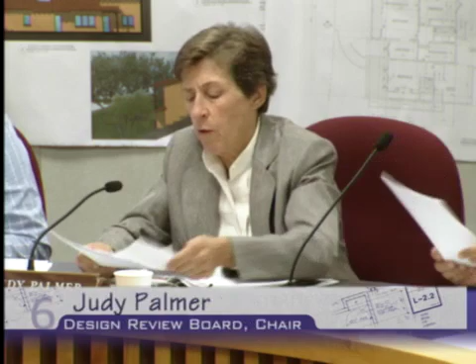Our first case is PDR 1407873-R, 3540 Buena Vista Avenue. And Ms. Toledo, if you please give us a synopsis.

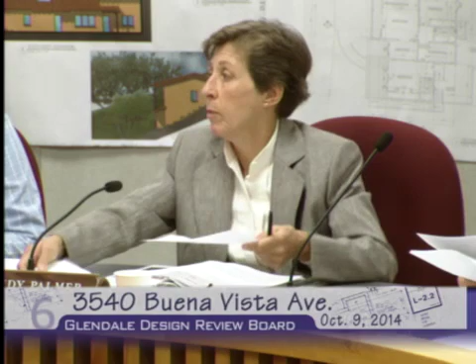Yes. Also, I'd like to put up on the board a couple more items before I start my presentation. I'd like to pass around the material board and the photos, and I'd like to put up one of the renderings. Also have the same rendering board that the architect can refer to, or the public.

If you recall, this project was before you back in June of this year, and at the time the board made a motion to return the project for redesign. So the project has returned with some modifications compared to the previous design. I have pinned up the old and new plans behind you: the new elevations, modified site plan, new landscape plan, and the floor plan.

So the applicant is proposing to demolish the existing one-story single-family house and the garage, and they're proposing to construct a new two-story, 2,495 square foot single-family house and a new 460 square foot detached garage at the rear of the existing 6,500 square foot lot.

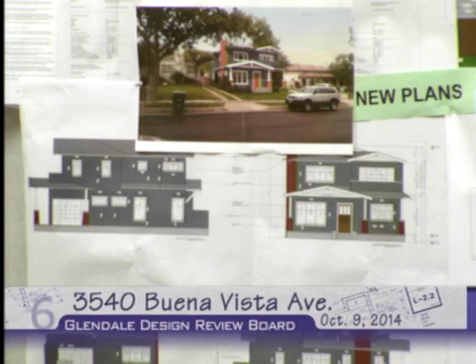Let the record show that we have received, once again, several emails or correspondence from neighbors in the neighborhood in opposition. We also received a letter from the Montrose Far Heights HOA, also in opposition. And we also received some letters in favor of the project, submitted yesterday by the applicant.

At this time, I conclude my presentation. If you have any questions for staff, I'm available.

No questions - we've all received those letters and read them. Yes, I have distributed all the copies. I wanted the record to show that, because I mentioned to everyone who sent me emails that I would forward those letters.

If we have no questions, then I'm going to open the hearing. Does the architect or the owner want to speak first? I have 2 of the owners and 1 for the architect.

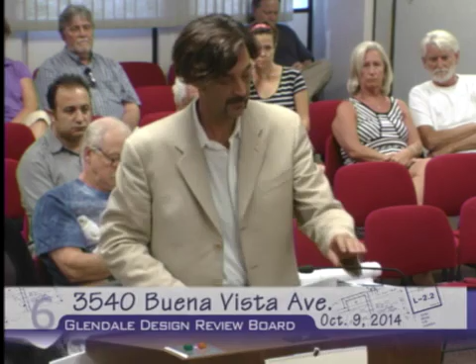Please state your name and address for the record. My name is Robert Thibodeau, and my address is 624 Venice Boulevard, Venice, California. Is that better? Can you hear me?

When we came here in June, you guys were concerned about the massing of the building, and the story poles showed some problem areas. So what we did was we moved the entire building back 5 feet, because there's a difference between the required setback here and what the neighbors are built on, the building line of the neighbors.

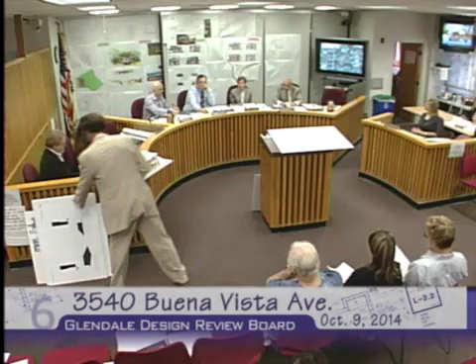So before we had been building to the required setback, we slid the entire building back 5 feet. This diagram shows that - we slid the building back 5 feet and then further reduced that. We already had the front porch designed, an additional 5 feet back from the neighbors' buildings, so we're another 5 feet back here, then another 3 feet back at the second floor.

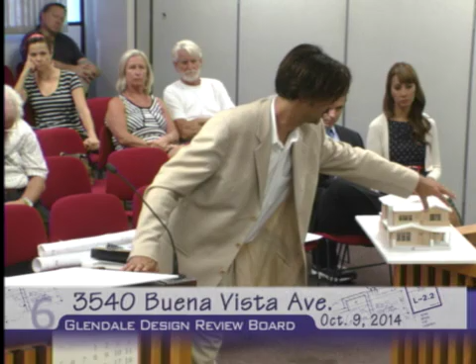This is to reduce the mass from the street. We had originally had a projection here, took that projection off and kept it flush with the rest of it. It made for a little less differentiation in the front, but it pulled the mass way back from the street, so the building would step further back.

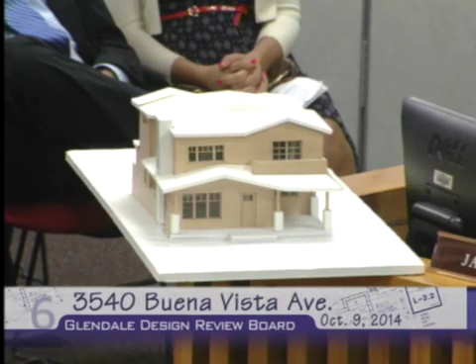The original building also had a slightly simpler roof line where the gables ran end to end, and we modified the roof line to be a hipped roof type, which was actually a suggestion from your design department. That lowered the height around the edges down to 22 feet, where 28 feet is allowable. So at the peak, we're 1.5 feet under, but the peak is centered, and we're 1.5 feet under the height limit there.

But at the edges that face the neighbors and the majority of the rest of the property, we're actually 6 feet under the height limit. So we feel we've done a really good job in pulling the mass down.

Then in terms of stepping the mass back, we went around the building and looked for spots on the second floor design where we could cut the square footage back. So what we did was, this was that spot in the front I was talking about where we took the mass back to pull it back from the street. We snipped back a little extra all the way along the front, and pulled in both sides.

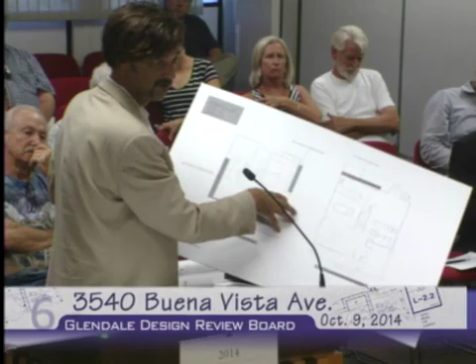We actually added a little bit of square footage downstairs to make up for some of the square footage we were losing upstairs, but there's an overall reduction in the project size of a little under 100 square feet, about 90 square feet. We reduced the entire project size.

Then there were specific comments from the rear yard neighbors, who I think are going to speak next. They were concerned about the master bedroom facing rear, which was the owner's desire to have more quiet before. So they wanted the master bedroom to be in the back.

So what we did was we flipped the layout on the second floor, where now the master bedroom faces the front, and the bathroom and closet are in the back. That was in response to these neighbors. We took the design and flip-flopped it.

There was also a balcony originally in the back. We removed it because they had privacy concerns, and they might have too, I can't remember. So we took the balcony off the back and put it on the front, where we had pulled the mass back, just to give it some differentiation. You can see the areas cut back on the side, cut back here, and the reduction and stepping back in the front, and the way the roof steps down.

At the garage, we had also had a gable roof, so the peak went to both ends, which increased the height as seen from the neighbors. So we changed this to a hip roof design so we could have a lower face, and we also lowered the ceiling of the garage by a foot down to 8 feet, which is about as low as you're going to go.

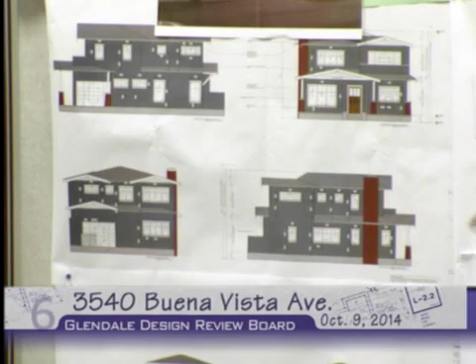Here, I see, this is it, the lower right one. This is the line of the roof going along. This is the chimney. This is consistent. No, I'm talking about this peak in here. See if you have this straight. That's what your model shows, and it's going to be a little higher. So I think the model is more correct than your drawing.

But let me ask you a question. Why did you do a hip roof in the garage versus a gable? Because the height of the garage was a big issue last time, so with the hipped roof, it keeps the roof lower on all four sides.

When I go to a gable end roof on the garage, two sides are going to be high. It'll either be, you have to choose: either this neighbor is going to get a high side, or these neighbors are going to get high sides. When I go to a hipped roof in the middle, I can keep it low and consistently low all the way around. But the height basically doesn't change, since the slope is the same. It's just how you orient that gable.

But you have a 12-foot point at the peak. If the peak is in the center of the building, I don't think it affects the neighbors as much as if the peak is at the edge of the building. What's the height requirement for a gable roof for a garage? 3 and 12, they can go up to 15 feet. Right, yeah, thanks. Is there any reason you have a 10-foot floor plate on the bottom floor?

A 10-foot floor plate is a desirable height for new build construction for a living room. It's not a particularly tall or short ceiling height, it's what clients would normally expect. You're 2 feet off the ground in addition to that, so the plate's like 12 feet off the ground. So it was a preference, is what you're saying?

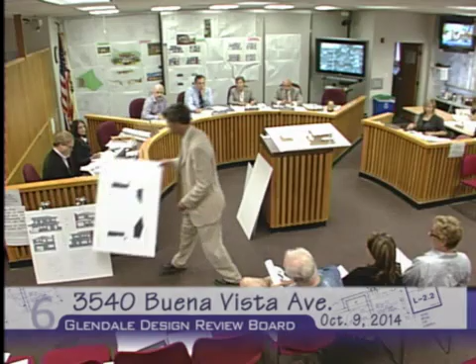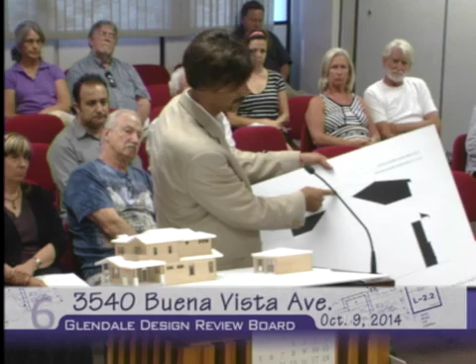I have a diagram of the height of the original building, which is a two-story or story-and-a-half building. This is the peak of the building that sits on the property right now, and this is our peak. This black line is what you see in the front, with the gable end. This is new construction we're adding, we're not going backwards. But if you compare the profile of what you see now versus what you will see, it's gotten a little bit bigger, but not really all that much bigger.

Did you explore putting some of the square footage from the second floor on the first floor? We did. We moved about 100 square feet downstairs, and we got the rooms to a size that we felt was about as small as we could get, because we want a 3-bedroom house.

Did you consider putting one of the bedrooms downstairs to expand that? That was suggested by Jay, but they didn't feel that raising a family and putting one child downstairs while the master bedroom is upstairs was a lifestyle choice they were ready to make at this time. In some ways they didn't feel they should be asked to do that. But that was definitely brought up.

Any more questions? Another question, madam. Sorry, I didn't mean to interrupt. That's okay. Let me get my train of thought again.

I noticed you have different roof slopes. How is that going to work all around this roof, especially the front? Because when you have this balcony and the roof cut with all these small edges, the slope is not matching with the rest of the house. It's going to be a technical issue or a problem when you construct this. If you lift this, the slopes are actually consistent throughout the house. I don't see it on the roof plan.

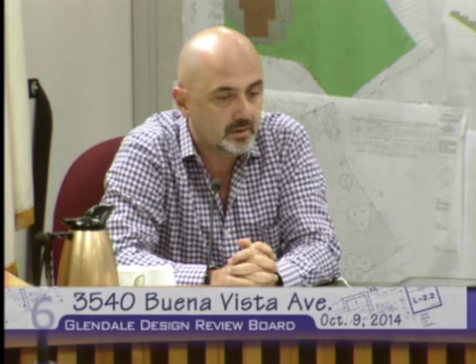In the past, we've had a lot of success when we've given advice and direction to applicants, especially when we send a project back for redesign, we definitely expect the applicant to work with staff. When it comes back to us and the majority of the items that staff indicates haven't been met, that brings a red flag for me, and I start scrutinizing and reviewing the plans a lot further.

I'm not sure if the applicant understands. In my opinion, reducing the mass and the scale isn't about pushing the building back a foot or two, it's the mass and the scale. It's not playing and Mickey Mousing the roof formation and lowering it 9 inches. The height is still the same, floor to floor, 10-foot ceiling height and 9-foot ceiling height, those are still the same. Sitting on a 2-foot podium, that's still the same. Reducing the mass means reducing the height, reducing the volume, not reducing the square footage, in my opinion.

I don't have any problem, even though it's probably going to be the largest within the three, based on the average neighborhood survey we got. The average house size is 1,500 in that area, and the average lot size is 6,500, similar to this lot. For that 6,500 square foot lot, you get a 1,500 square foot average size home, 1-story. In this particular case, a 6,500 lot is getting a 2,500 size home. So obviously it's within the right. I don't have any objections to the size, but if the massing and scale isn't appropriate, then I'd have to start looking into the size of the building.

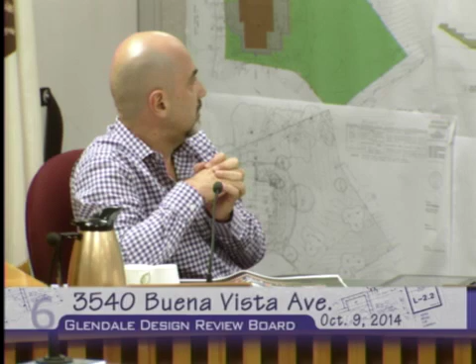I truly think the formation and forms of the original, the first go around, were a lot more consistent. The roof made sense, and as we're getting further into this, trying to pull and push and do different things, I think it's just losing its character.

There are great examples of Craftsman in Pasadena and around here, Greene and Greene projects, with a shallow slope, exaggerated overhangs, and recessed or setback second levels, with large overhangs over the balconies and so on. In this particular case, we're dealing with a small lot, so we can't really do that. And it's a great example of the roof over the garage.

We didn't want you to change the form of the roof, we wanted you to lower the roof, not change the form. So tell us that, okay, now we've got a lower mass. It's not, it's the same height, it's the same plate height. So in my opinion, I think they missed the boat like crazy, and it's really the wrong approach.

Not to listen to staff and get their advice. They've been here, they listened to us, they know what we want, and when we get projects where the majority of comments haven't been met, that's a problem for me. I do have to put it on record that I have disagreed with staff on many occasions, but in this particular case, if the majority of the comments that they've noted haven't been met, then that's a problem for me. Mr. Chartian?

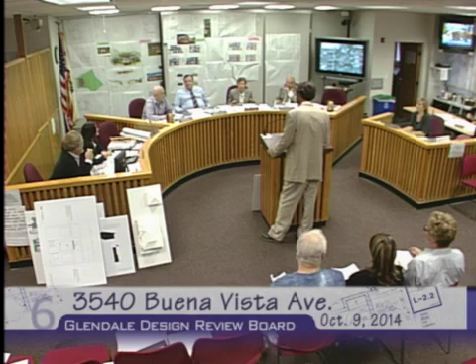The owner might want to speak. Go to the microphone. I'm more than happy to take into consideration everything that's been said here and submit another house for redesign, but I don't know if it's just a personality issue, but there's been problems, and I'm not going to say that it's all on one side, but there's consistently been personality issues.

Well, with this, I don't think we're here to judge personalities or what has happened. We're here to look at the design and make a decision. We've given a very direct direction to you and your architect on what we want to see, reduce the mass. It's gone back, and we got this back in 2 months down, and it's almost identical.

So I'm going to make your job a lot easier, so that if you're going to redesign this, I'm going to deny this so that you can start from scratch, come back to us with a brand new application, figure out what you want to do. You may even get a new planner, I don't know. But this way it'll help you and it'll make a decision. So I would like to, and thank you.

I'd like to ask the owner a question. Could you come back up, please? I want to first say I understand your frustration. I've built houses, and you go through a lot. But there's a disconnect here. Okay? Personalities aside, there's a disconnect here. And that disconnect needs to be resolved some way if you want to build.

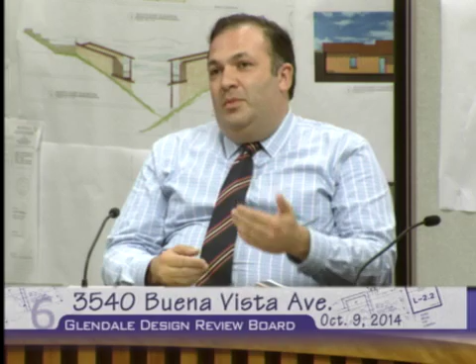So I want you to understand that, and for what that's worth, okay? So I think by doing that, that will at some level... Can I ask you a question? If we come back with the 2,500 square foot house and we move one of the bedrooms downstairs, are you guys going to support us, or are we going to do this again? We would have to look at your design. Of course we would. But in general, I'm just saying in principle. That was a suggestion. We move 100 square feet off the upstairs, or 120, whatever that bedroom is. Shrink it up a little on the sides and stuff like that. Are we going to do this 10 more times?

Honestly, at this point, if you had a design I could pick that met my square footage requirements, I would just take it. We've given you exact, there's like 13 items that we've given you what we want to see. Reduce the mass and the scale. And it's up to you how you want to interpret that.

We're not here to literally sit there and sketch and design the project. We cannot do that. What we can do is comment on the design that comes in front of us. So if you decide to reduce the mass, moving a portion of the upper level downstairs, reducing some of the ground floor area and the upper level, reducing the height, increasing some of the overhangs and setbacks and all that, it's up to you. These are the things we've been saying in two hearings, and all the neighborhood is coming and saying the same thing.

But if you come back to us again with a 10-foot... I'm just trying to help you, not saying go back and redesign and come back with a brand new project. I speak for myself and my husband. We greatly appreciate the size allotment, the 2,500 square foot, and we will change all of the restrictions that are on there and come back.

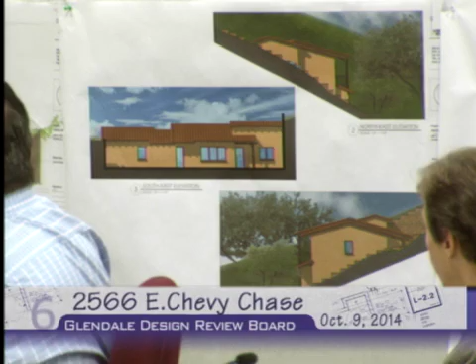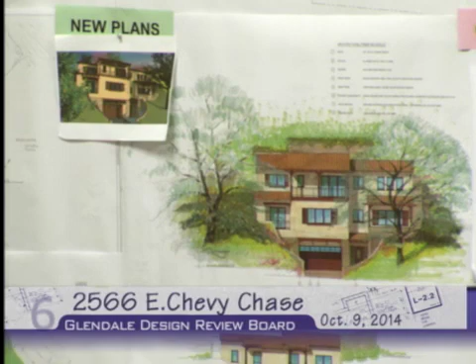The total amount of grading was reduced from 1,985 cubic yards to 1,650 cubic yards. The revised design includes modifications to the front facade, the retaining walls, and the staircase. In addition, the proposed total floor area was reduced from 3,072 square feet to 2,892 square feet. So the changes to the house that I just described resulted in a reduction to the overall proposed grading, now reduced to 1,650.

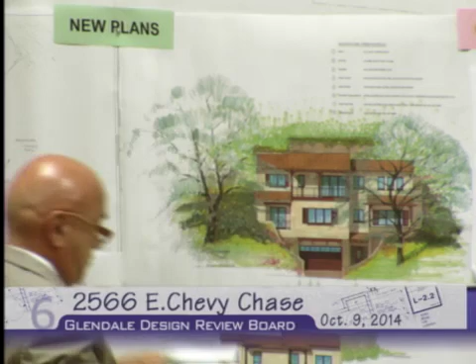Item 2 was to provide more articulation at the front facade. Based on the revisions they made: the relocation of the front entry to the ground floor at street level, the removal of the staircase at the front, the reduction in the number of retaining walls, the new rafters above the garage doors, stone cladding on the front facade, and also redesign of the balcony and the fenestration at the 3rd floor, and the redesign of the roof and the balcony on the 2nd floor on the right side.

Those changes at the front of the house have articulated the front facade, and it shows thoughtful execution of the design and the use of materials in its application. Item 3 was to redesign the front stairs to avoid removal of the large oak tree at the front of the property, possibly incorporating a floating design that would protect the root system of the tree.

So as a result, the new design with the modifications, including the removal of the staircase and retaining walls at the front, has enabled the preservation of the existing oak tree located at the front right side of the property, visible on the site plan. The relocation of the front entry to the ground level was a good solution, which eliminated the need for multiple stairs and walls at the front.

The new front entry will be accessed from the driveway, and fire-required stair access will remain along the right side of the house and follow the natural grade.

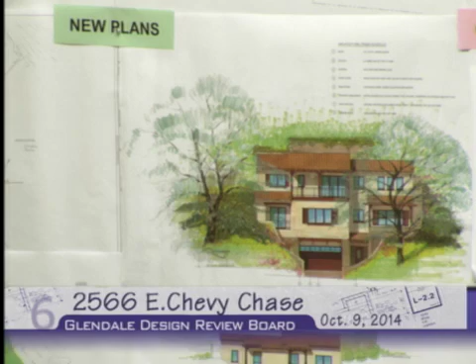Item 4 was to incorporate additional landscape at the front of the property if condition number 3 couldn't be met. But as described in item 3, the existing oak tree will be preserved. In addition, the applicant will be required to adhere to the mitigation measures in the indigenous tree report, with an addendum prepared based on the modifications made to the project.

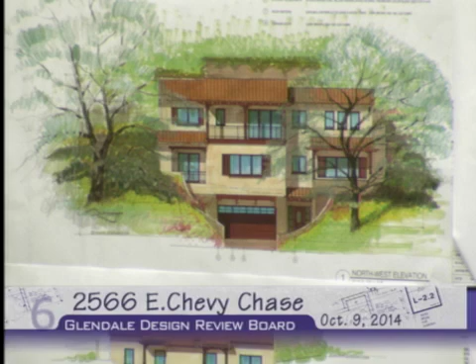Item 5 was to introduce a stone base at the front of the house on either side of the garage, with an appropriate datum line to reduce the sense of verticality at the central bay. That has been addressed. The revised design includes the stone base as requested by the board, and the use of stone at the garage level and beyond articulates the front facade and reduces the mass and sense of verticality.

Item 6 was to enclose the area under the cantilevered landing. As described in item 3, the front entry stairs were removed, so the existing oak tree at the front right side was preserved. So this condition is moot.

Item 7 was to reduce the width of the shutters at the windows above the garage and at the right side of the 2nd floor. The width of the shutters above the garage was reduced. The shutters at the right side of the 2nd floor were removed, and 3 individual windows were introduced.

Item 8 was regarding the zigzag retaining walls, where the board recommended avoiding those. They have done that—the proposed retaining walls of the driveway are straight and simple. No zigzag walls are proposed.

Item 9 was to clearly identify the trash location. They have done that—the trash location is at the front left side between the planter and the garage, screened behind the wall. That concludes the conditions the board made at the last meeting.

I did receive a letter from the Chevy Chase Homeowners Association. I got 3 copies, which I passed around, so please review that. Apparently they attempted to email it to me yesterday, but I did not receive it for some reason, and I have not read the letter, so we'll find out.

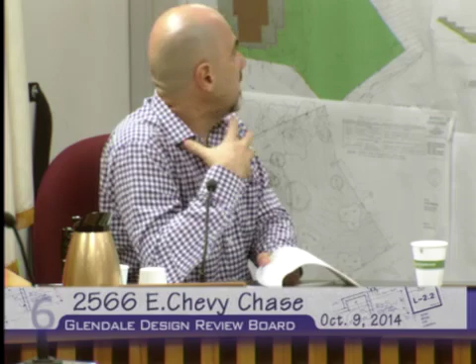So in this particular case, I'm going to rely on the perspective in making the decision, more than I would rely on the elevations. I think effort has gone in, and I don't know if everybody has been able to see this, but it has improved the project. I appreciate the reduction—I don't know if the height was reduced, I don't think it was, but something happened that makes it less massive, in my opinion. There's obviously some fine-tuning and some elements there that I think would help fix it, but I like that perspective. Okay, Mr. Charchian?

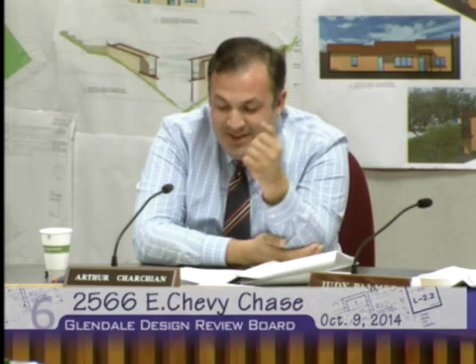My initial concern is the 17-foot, basically high retaining wall, 15 plus 2. Overall, it looks like there's been a lot of effort on the exterior of the home to address the height and the mass, but that 15-foot or 17-foot wall is still visible. When you're in that backyard area, it's also going to be a very large wall. I think you need some sort of vertical landscaping component to soften that from the street.

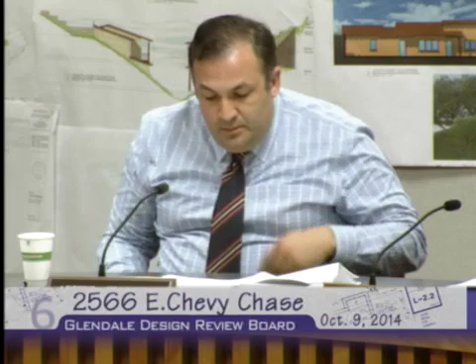I do have some conditions I'd like to add regarding the member sizes of the wood framing, the exposed rafters, and the beams supporting the balconies. You could see that on the side elevations. I think they need to be as thick as the column.

One of my critical comments, and I'd like to hear what my colleagues say -- I think there's a substantial improvement in the elevation. Something has happened with the height, but I still have a concern with that middle piece. It seems like the triple windows above the garage seem a little high. I don't know if we could achieve that by raising the stonework to be in line with that balcony, to further reduce it -- there's an overhang there, I believe.

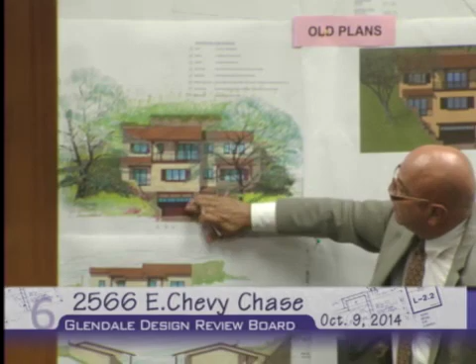There's an overhang here, I'm talking about above the garage. Well, yeah, but that whole garage is covered. I think what the detail work is doing is you're looking at some symmetrical element there -- you've got the post above. It would allow you to split the window, put some post, some detailing in that area. You've got the sliding door behind it that has nothing to do with the center or the columns and all that.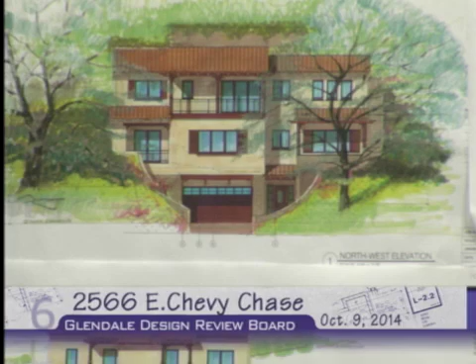No, so there's certain things that can happen there -- it's just solid mass. It got better than what it was before. Well, yes, definitely, but I thought maybe if we don't want to reduce the ceiling height, maybe continue that stonework a little higher. I'm in agreement with that. Would a kind of flower pot shelf work in that location? That's one way to -- so you will have options to consider ways to break up the mass between the sill of the window and...

Is that the 15-foot setback there, on that elevation? Sorry. That's what it looks like. Yes, it is? Yeah.

Holistically, on these style homes, although someone might say you really can't see these roofs that much, you will see the lower roofs. I think two-piece tile is more appropriate for a style such as this. Going back to that section, can a volume be placed over that so that it gives some...

Like what you suggested, if it's within this front setback? No, any part of the facade would have to respect the setback line. But wouldn't that be like an attachment -- a decorative attachment? Something like a canopy or an awning could project 30 inches into the setback. So a flower shelf could project, but we couldn't build a structural part of the house that projected over. Got it.

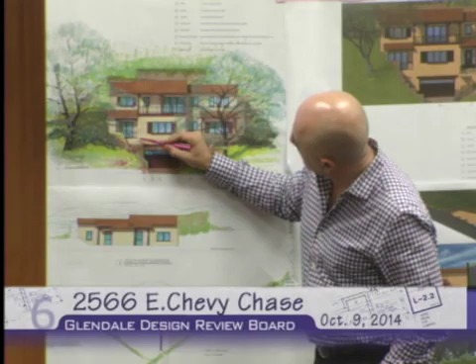There's a retaining wall indicated where it's probably based on this. I think this will allow some sort of a break here, so this volume sticks out, or gets pushed back in. If the retaining wall is there and the railing sits back just a couple inches, that may actually be better.

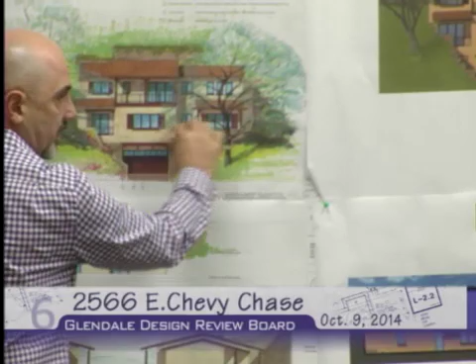So the goal would be to offset the plane of this projecting garage. What's happening right now is that we're looking at this and it's carrying over. So that volume, and then if anything needs to happen at the bottom of this, centering it or something—pushing back the terrace a small amount, not necessarily, just detailing it properly.

Are we done here? Are we covering the recess on the window? That's part of the conditions, that's always standard on these, and I think he's shown it also. I'll make sure.

I agree with putting something on the bottom of that center portion, stone or finding it. Also, a comment—you've got several balconies, and we see this in a lot of projects. The balconies are 3.5 feet, they're not usable balconies. I would suggest they increase, take the kitchen back or the rooms back a little bit to have a usable balcony if you're going to build one.

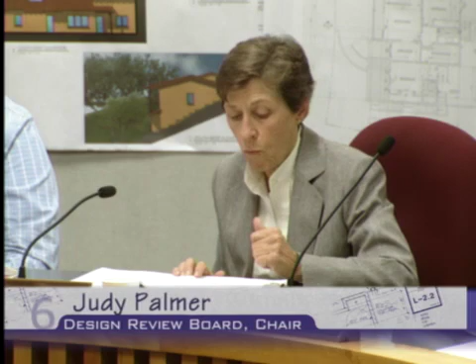Is it a consideration? Yeah. And then I want to make sure, on the oak trees—I keep coming back to this—the two in the front that are remaining, there's going to be a lot of grading, a large house, so the water that's used to coming down the hill and reaching these trees may be diverted, so some watering capacity should be installed where the oak trees are. And the front area should have landscaping indigenous to planting under oaks, because as it's shown, you're going to have retaining walls and just dirt and the oak trees for the whole front yard. So I think we need some planting in there.

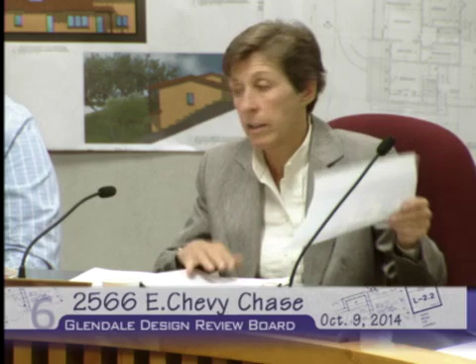And that's under the oaks? Right, along the front, along the parkway, and around the walls—this is all going to be just dirt when it's done. So I think we need some planting, but make it planting that works with the oak trees.

Otherwise, I agree with the other comments. Do we know what the garage door material is? I didn't see it here. Have to reopen. Mr. Hagopian, garage door—could you tell us what the garage door material is?

With the new redesign, we don't know the material of the front entry door, and just to make sure we understand, we'll make sure that the front entry door and the garage are appropriate materials. Put that as a condition to include that on the drawings.

If there's no more discussion, do we have a motion? I'll make a motion to approve the project—because you now have the responsibility of the conditional use permit also, we need a first motion to approve the grading that goes over the 1,500. Did we already sign that?

I know, but don't they need to make a finding? That's for the environmental, motion on the environment. Okay, we could do it just to cover all the bases. They actually need to address - there's no conditional use permit requirement, but the items that would have been considered as part of the conditional use permit are now under the purview of the design review board.